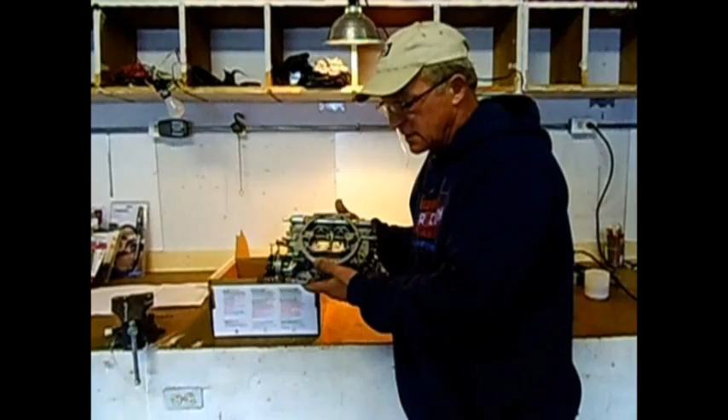Now, where the groove goes, as always, it goes in the area on the primaries alone on these carburetors. You don't want to do the secondaries because this area is too thin, and if you cut two grooves, they join in the center and ruin the effect. So you'll look for the primaries, which are generally smaller than the secondaries. The secondaries kick in only when you're in full throttle mode, which is not the best time for fuel efficiency. So the grooves go on the area of the plate closest to the engine.

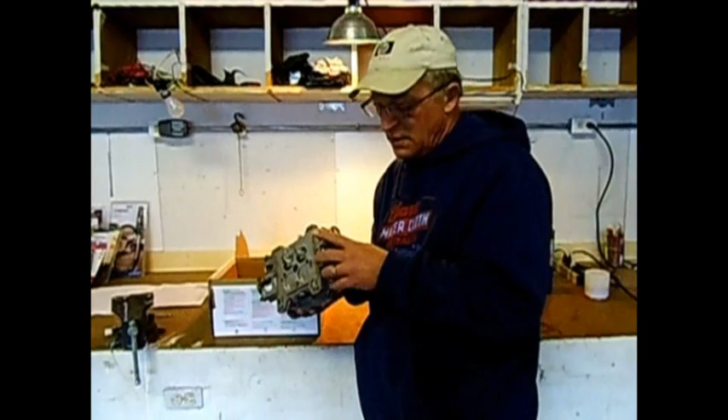So when the accelerator opens, the throttle plate passes over the groove. When you work on these carburetors, you need to make sure this throttle plate is all the way closed. There's linkage on the side in various configurations where you can see that throttle plate. Here, I'm going to move the linkage — this is the fast idle cam. You move it that way, set the throttle screw down, and look at it until the plate is completely closed. At that point, you're ready to groove. You may choose to take a zip tie or something to tie this area back so you know the throttle plate won't move while you're doing the groove. That's the carburetors — they're all basically the same.

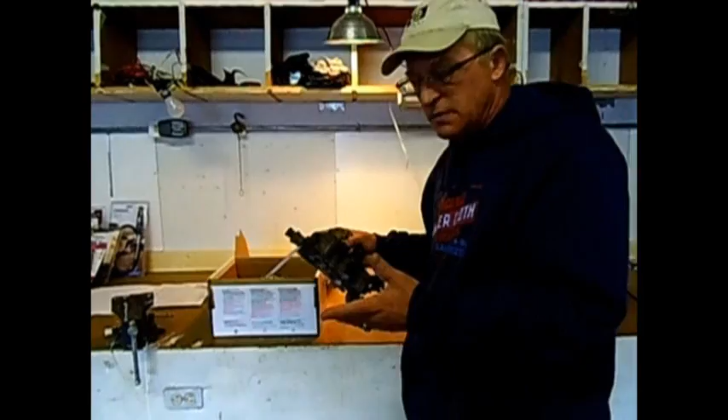That's the oldest style. They may be 1 barrel, 2 barrel, or 4 barrels, but then they moved up from that when computer controls came in, introducing what they call throttle body injected systems. Now these are the injectors. This is off a 305 or 350 series GM engine that came out starting in 1986 and ran through 1995. Today, engines equipped with these don't get the best mileage — generally somewhere between 8 and 12 miles per gallon when I see them, but when I leave them, they're anywhere from 20 to 30 easily.

In any event, when you take these off, this is where the fuel lines hook up. You'll need one wrench on this back piece and one wrench on the line that holds it in. Hold one still and move the fuel line connection, doing the same on both sides so you don't twist it up — because if you twist it up, you're going to wish you hadn't, and you'll have to make more trips to the parts store. A little trick when taking these throttle bodies off: loosen the bolts. There are 3 bolts that hold it in place — 1, 2, and 3.

They come in various configurations. There's a number stamped on the forward side of the car, on the throttle body injected unit, right here, that is the designator for that model. So if you need to order one, you'll need that number.

So you loosen up these bolts, but you do not remove them, just enough to where you can take these lines loose. Don't try to pull them out. If it's factory, it's a metal line bent a certain way, and if you bend it, you'll have a hard time aligning these things back up. So loosen the bolts, then take the fuel lines and drop that nut back out, and then lift the whole unit out of the engine.

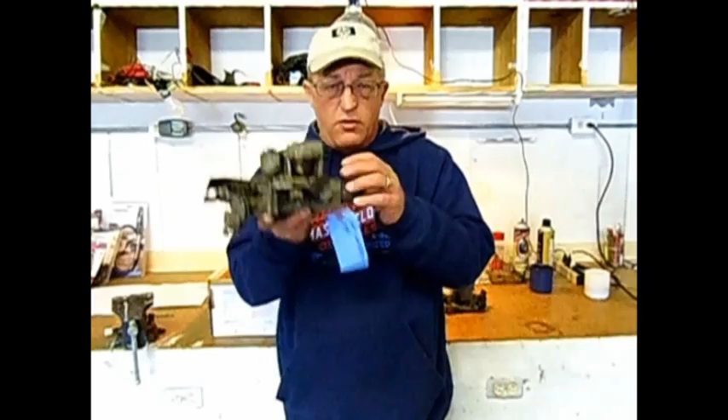The vacuum ports will matter. This is your PCV port, so you're going to be capping this one off on every engine that you do like this. That's the throttle body injected units.

From the throttle body units, advancements were made. The computer gained more and more control over the system, so they didn't need to have all the injectors up here. They moved to a multi-port system where the injectors are actually mounted just before the intake valve. Then the throttle body system became a whole lot simpler. All you have is a cable that opens and closes the throttle plate, and you have a connector for the throttle position sensor. Now, some are a little more complex.

They also have coolant lines run to them and a few other odds and ends, but don't worry about that too much. Just if you pull a hot engine in, make sure you relieve the pressure on the cooling system before you disconnect any coolant lines. You relieve the pressure, and then once the pressure's bled off, you close it back down. As the engine cools, it will create a suction on those lines so that when you do take the coolant lines off, it pulls the coolant in rather than pushing it out. You don't want that stuff spraying you in the face or wasting anything if you can help it.

Now, once again, on the back side, let me just pull this tape over here, it doesn't matter. This is what you'll be looking at. This is the idle air pathway. It goes through a channel on the intake manifold. A lot of them have them here where they vent right into the throttle body, or they manage through a valve on the outside of the engine. But the groove just goes in the area that turns toward the engine, in the throttle body where the plate is closest to the engine, so that the plate will move over the groove.

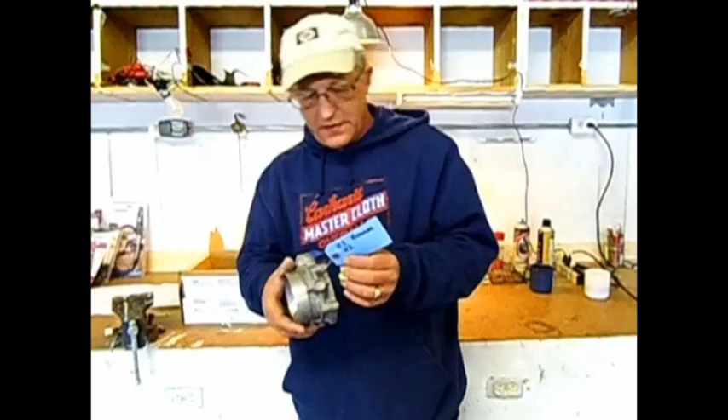It's the same in every engine. Some imports in the 90s have computer-controlled throttle bodies, but that was the next advance that hit the U.S. market. Now this is a throttle body off of a 2003 Hummer. As you can see, there's no cable. Instead, there's an electrical connection here that hooks up, and inside is a little electric motor.

So when the computer sends a positive, or if it sends a negative voltage, then the throttle plate will snap shut, which is what happens when you turn the key on in these GMs. Then it'll relax a little bit to the idle position. Then when you turn the key off, it relaxes completely.

In some GMs, this will cause what's called the Gadgetman plop, which is caused because of the groove that's machined in this plate here. You may be able to see it from that angle. Since the groove is always charged with air, when the key is turned off, it cuts off all power simultaneously to the system. So the groove is charged with air, the engine's running, then the computer turns it off and it tries to relax it. Well, what happens is the pressure inside the groove will snap that throttle plate shut, and it makes it sound as though you're slapping your hand on the end of a hose.

Let's see if I can make it happen here. Something like that, only a lot louder.

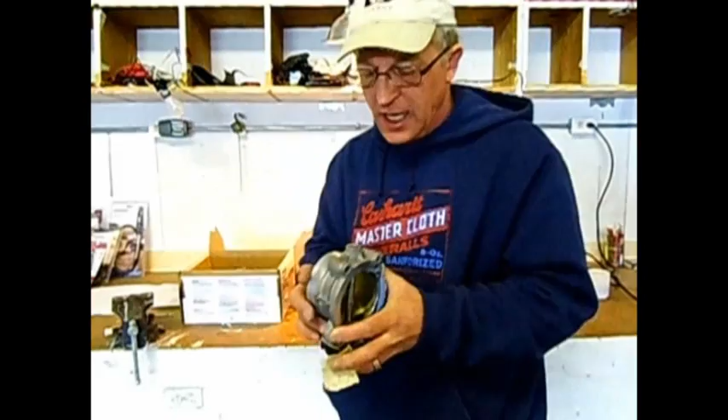Okay, so those are basically the throttle bodies you're going to be dealing with. Some will be a little more complex, some will be a little less complex. So the next step is we're going to cover how to do the groove.

Alright, now the first thing that you're going to want to do with every vehicle you touch is to get a copy of your modification report form. As you can see here, I've already had the customer fill out all of our information here so that we can have it in one place. Now we have her name, address, telephone number, email address, and it's very legible, so if you have problems reading their email address, please take the time to write it out underneath there and ask them to confirm it.

Then we have the year, make, and model of the vehicle, size of the engine, and we have the mileage count on it, 183,000. Now what you do is you're going to look at this form, and it's going to give you a little bit of information to start with, especially when you look under the hood. So, as I see here, it's got 183,000 miles on it.

Well, a little known fact about oxygen sensors is somewhere about 50,000 miles they give up the ghost. And what the computer does is when the oxygen sensor begins to get a little sluggish, it quits using the oxygen sensor as a point of reference to remap the fuel trims. And if it's not going to change the fuel trims, you're pissing in the wind as far as getting good results. You've got to make sure that all the equipment is up to snuff and they follow the proper maintenance cycle.

So the first question I would say is, when did you change your oxygen sensors last? In this case, I know that they were only done about 3 months ago. So we know that we're good on that. And the current mileage is there so that you have something to compare it to.

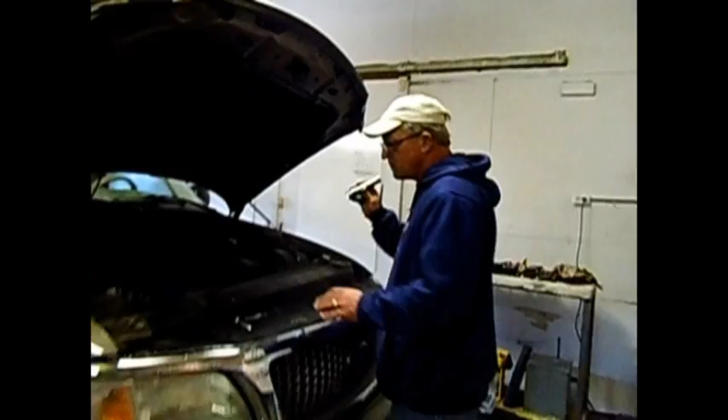Now, the first thing you want to do when you pop the hood is take a look. Come on over here and we'll identify everything. This is our air filter, and then there's the air tube, and here's where they put the mass airflow sensor or the intake air temperature sensor, or both. Usually they combine them now. But this right here is your intake air temperature sensor.

This is the spot for one modification. We have a 3.3 ohm resistor that we put into that. And then the air flows through the filter box all the way through here, and underneath that cover is where the throttle body is located.

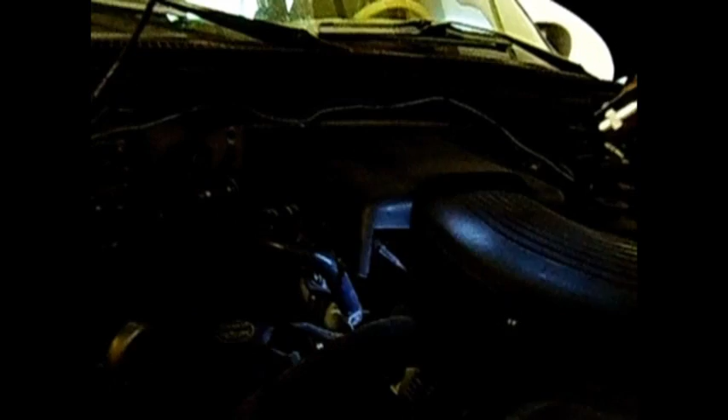Now you're just looking, and you can see this engine's got some pretty good hoses, so there's probably not going to be any real issues with vacuum. What we do is pull that cover off, then pull the throttle body out. We'll skip over a lot of that because it's pretty self-explanatory. There's a bolt there, two bolts over here, or one bolt, whatever, and the cover just pops off, and then you remove the throttle body.

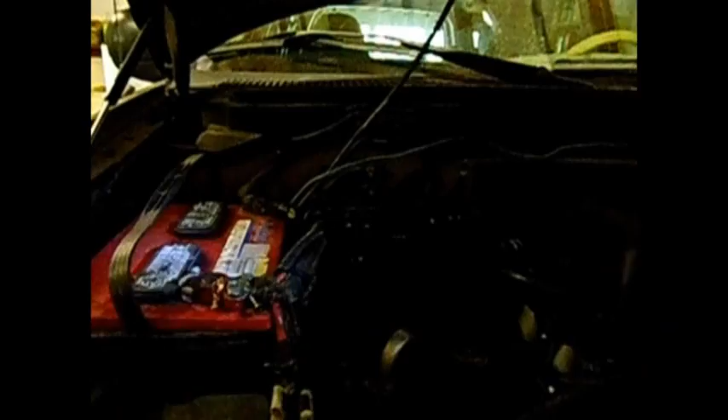Our concern right now is the battery, because one of the first things you have to do is get that computer reset so it can accept the new fuel trims. Now, this is the procedure for clearing the ECU. It is very, very, very simple. Most engines nowadays will use either an 8 or a 10 millimeter bolt on their cables.

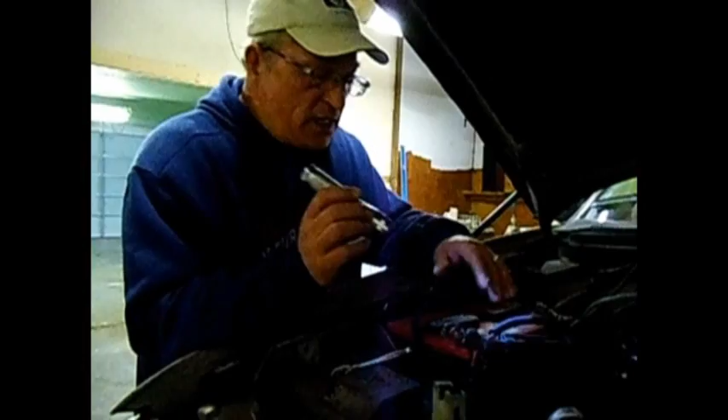As you can see, this one here was kind of jury rigged. I certainly did not do this work, but I've managed to hold it together for about a year. We have to replace all our cables, and that's why that hasn't been done yet. But what we're going to turn our attention to is the negative cable here, and this is an 8 millimeter wrench.

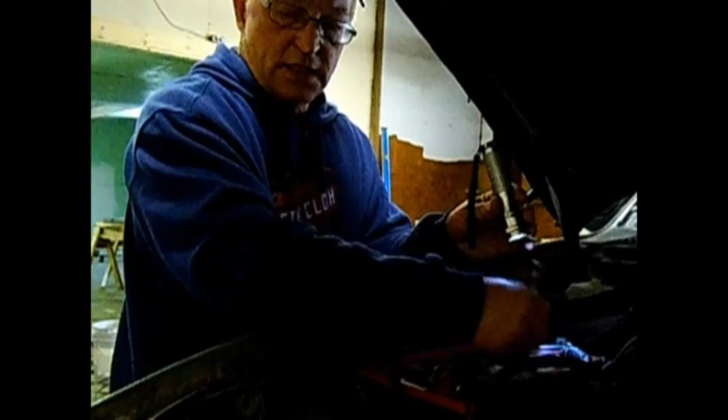You just loosen it up, just a little bit like that. Then you take and pull it off.

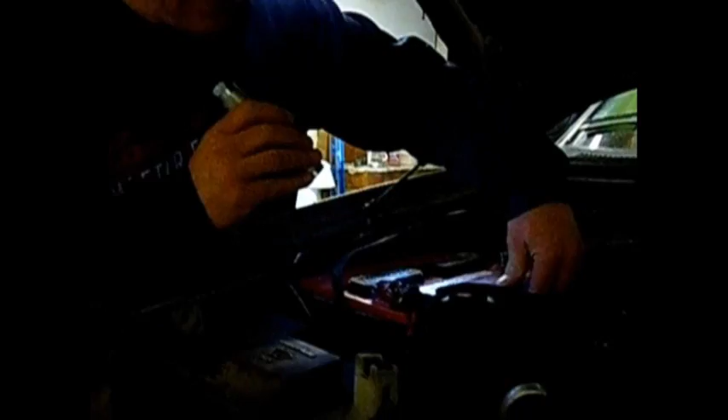Okay, so now the cable's been disconnected. Now you've got to get it where it's not going to be reconnecting, because you'll fry your jumper wire. But I've made a jumper wire here with a couple of different connectors, because it doesn't really matter what type of connector you use, so long as you connect the negative cable, like this right here, the one end of the clip, over to the positive.

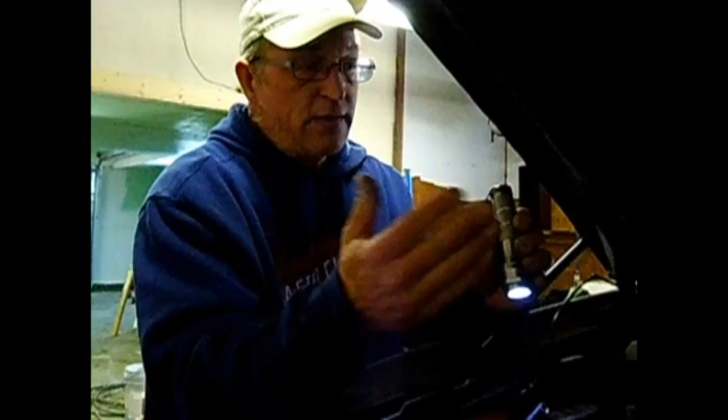Then that's it. What you do is turn the key into the run position, rolling it around where you'd normally be starting the engine, then release it so it falls back into the run position. You just leave it like that while you perform the rest of the modification, which should take about half an hour, sometimes longer. You'll get faster as you go. All right, so that's clearing the ECU. See how easy that is?

All right, now most of the throttle bodies you'll be cutting will be very simple. The newer throttle bodies, though, do require a little bit of setup before you do them, and those are the electronically controlled throttle bodies. So that's what we're about to show you now.

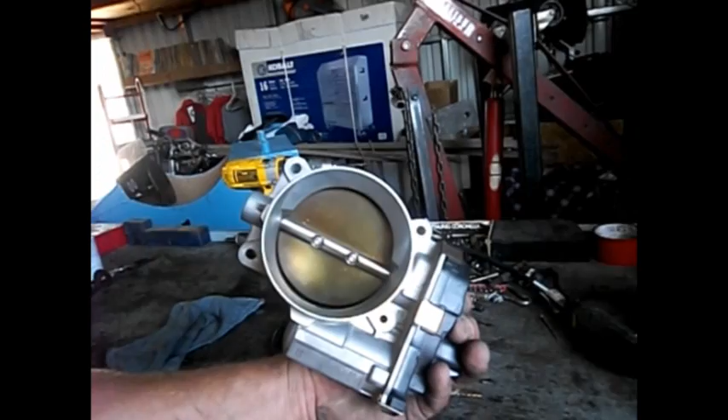Alright, now guys, we were talking about the drive-by-wire, fly-by-wire, computer-controlled throttle bodies, and what I have here is a throttle body off of an '08 GMC Yukon, which is the same across all General Motors. But if you look down here, this is how you tell where to put the groove. If you see that black line right there, that's the exhaust gases. That marks the natural idle position. Let's see if we can get real close there.

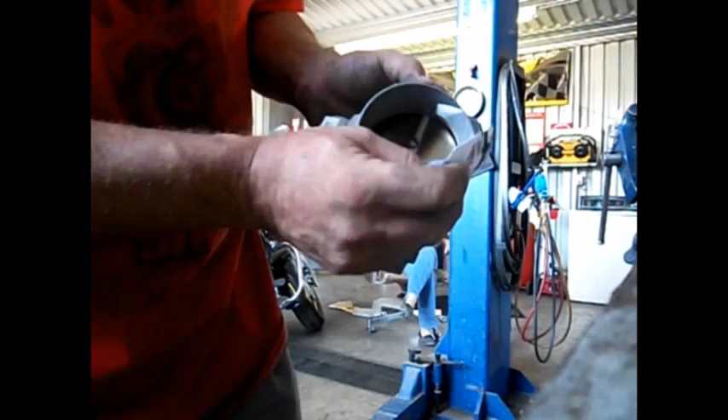So what we're going to do is slide that throttle plate closed and wedge it somewhere like that, just where a little bit of the black line is showing, and that's where we're going to cut the groove. Now I'm going to set this down. What I've done is snagged a business card from my bank, my business cards work good too, but I'm running out of those. So what we do is take this and simply place the business card in the upper section of this, then push it closed, and inspect it to see how close we are. So let's look. Look.

You see how little of that black line is showing? Some is, but not very much. We're looking at maybe a maximum of an eighth. So I'll probably push that a little closer shut, but that is how you find the position on fly-by-wire throttle bodies to cut your groove.

And again, the groove goes on this side right here. Because of the configuration with this throttle body, it's got a high scoop to it here, so I'm going to go with a steeper angle on my bit so that we can be sure to get the full groove into the throttle body itself. There you go, guys.

Have a great day. Alright, now I just finished grooving that throttle body, and I want to show you where I started, where I finished, and what it looks like. See, there is the throttle body. Of course, we start at the far left over here, and we do a little scoop, a little scallop every time. Now this one's done by the master, of course, but as you can see, there's still some scalloping.

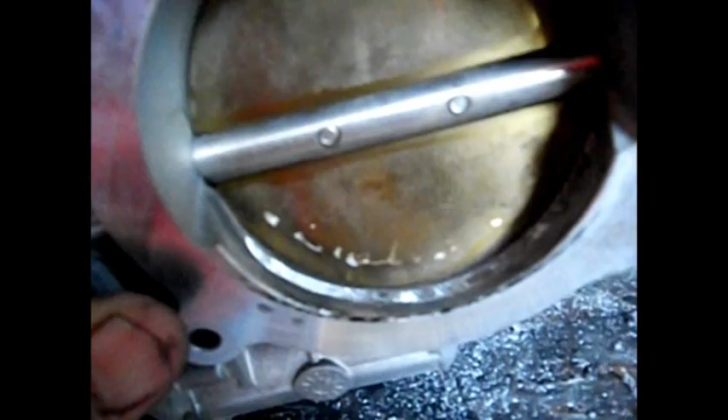And that's okay, I don't worry about that at all. But you can see how the bit actually brushed up against the top part of the throttle plate. That's the starting point. You look down, and you can see that there is. Let's see if this thing will focus a little better. Okay, you can see there's a little bit of clearance here between the throttle plate and the groove. I don't know if you can see that clearly from here or not, but there you go. You can see it there.

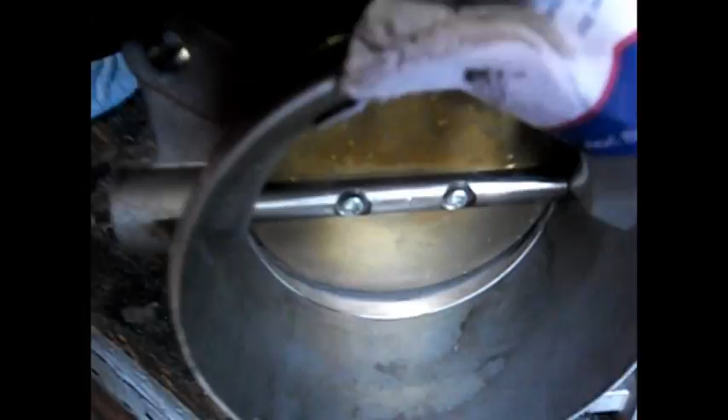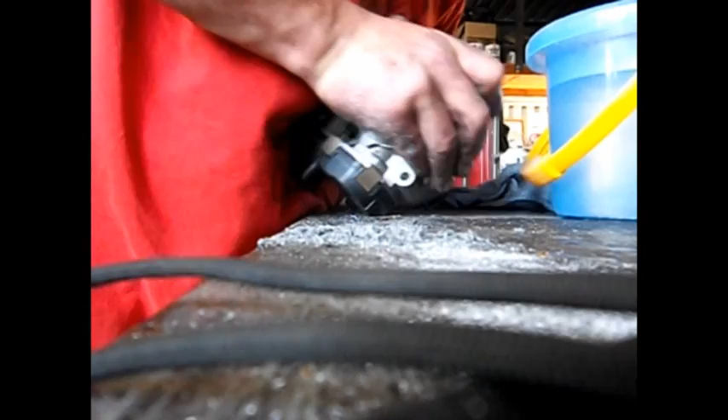All right, now looking at it from the front side, you see there is your black line. Now I'm just going to pop this loose, real simple. All right, push her down, push her around, and pull out your business card, which is now wasted.

So now, when you look down at the throttle body, and this is the test, you look here, you can see the groove, you can very clearly see the black mark, which is the natural idle position. And we close this up, that's where the engine will be idling, right there. It's going to relax that far. That's how much room you have before the groove actually gets in and kicks into full force, right about there. So there you go, that's the Vortec, and that is how to do a computer-controlled throttle, and these GMs, they're funky. So anyway, enjoy your adventures in Gadgetman Land.

Alright, now what we're going to do is talk about using the bit. So we got the throttle body off of the vehicle, now we're ready to move into cutting the groove. Alright, now what we have here, this is the normal throttle plate assembly. It's usually not that thick, it's a little out of scale, but I'm not an artist.

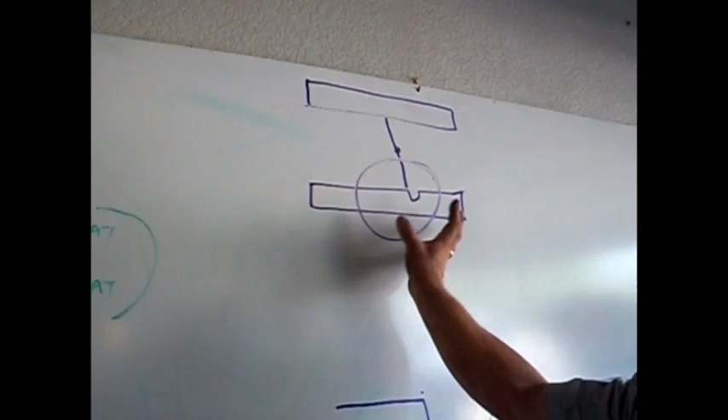I am a gadget man. Alright, so the throttle plate's here. All of the air is moving this direction in the throttle, okay, and here's the engine, it goes into the engine this way. Well, since all the air is hitting this plate, all this air is moving this direction, what happens is all of this air here gets compressed because it has to go down the plate. In order for it to continue moving, it has to come down the plate. Alright, that makes all of this air be forced into this small area, so it becomes extremely dense.

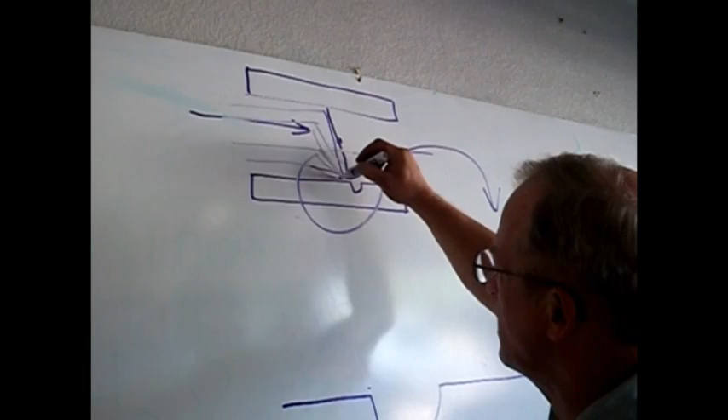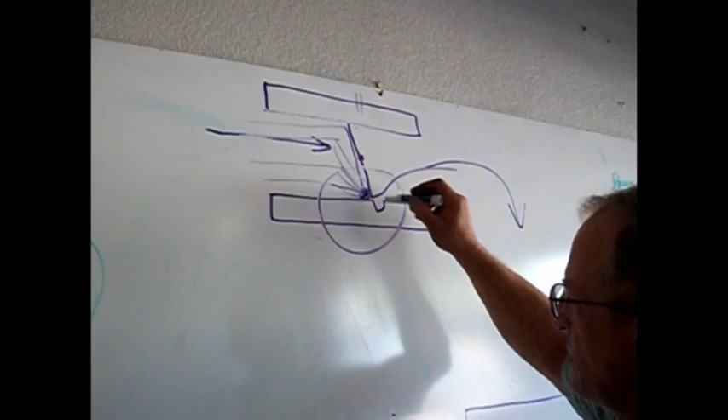Here, it's very high pressure here, this is where your air bleeds are, okay? Now, so what we're going to do is apply the groove just past the throttle plate, so that we can get the waveform that we need. Now, when the air is moving properly, what happens is the air will come in this side of the groove and curl up this way. The part above this will just go in and become the intake airstream.

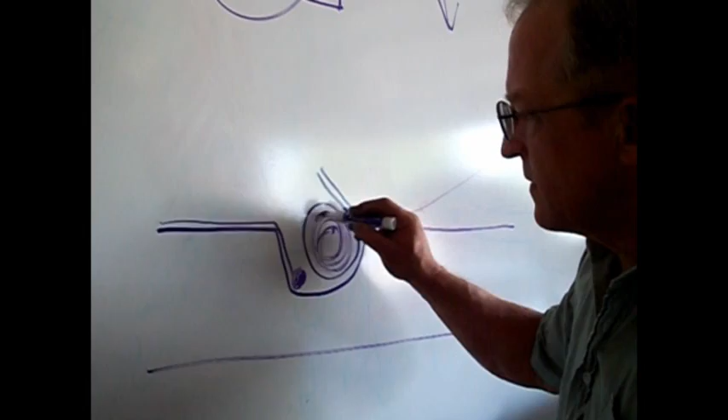For the first half of the downstroke, this ball of air is built, but then you've got other air coming in this way that comes down this way and then is gathered up this way. In order to get these two balls of air to be the proper dimensions, you have to have the groove cut at the correct angle. Well, actually, this should be down a little bit more. Anyway, let me just wipe this off, and we will take a look at how to do that.

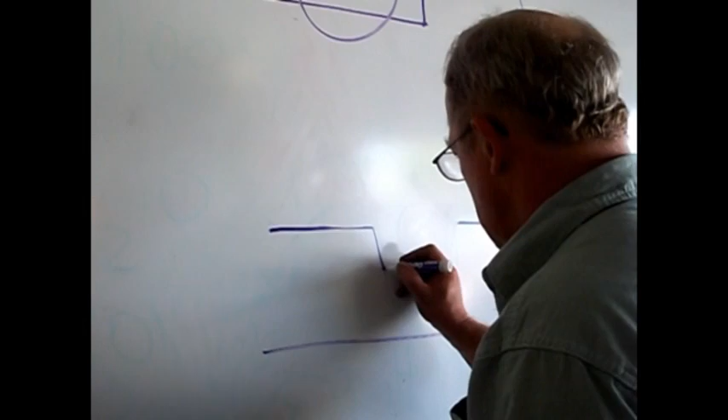Okay, so now here's your throttle plate. You're going to use this as the backstop for your cutting. You'll see that in just a couple of minutes on the DVD when Greg starts to cut the throttle body.

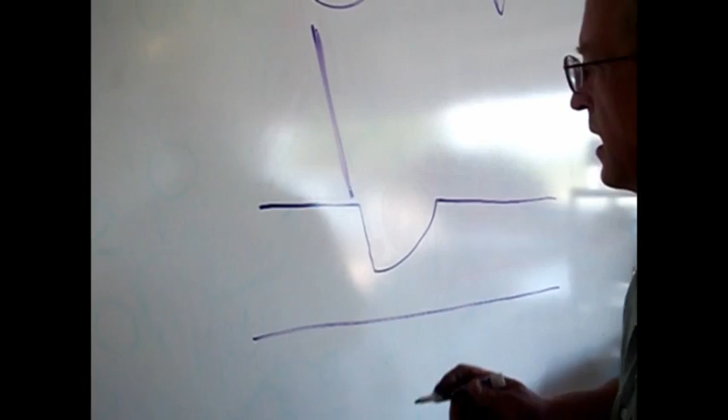Now this is one of the bits. You can see it's kind of like a half round shape. It's not exactly, but it's close, all right? And in order to get this cut correctly, you have to use the bit in the proper manner.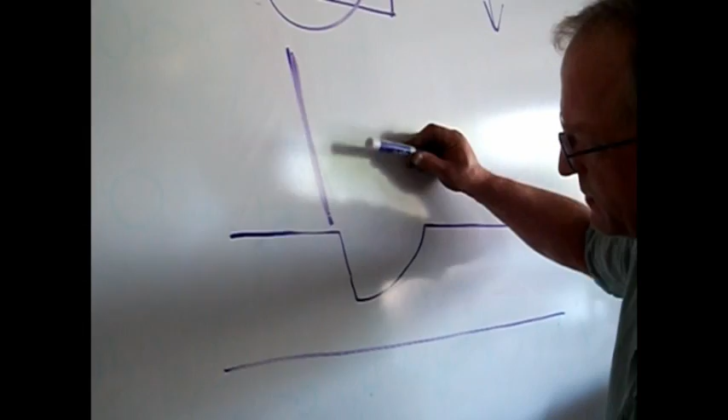So if you take the bit in your Dremel and you hold it like a pencil, which most people want to do, no, because it's going to make your groove incorrect. The bit is shaped perfectly to create the groove.

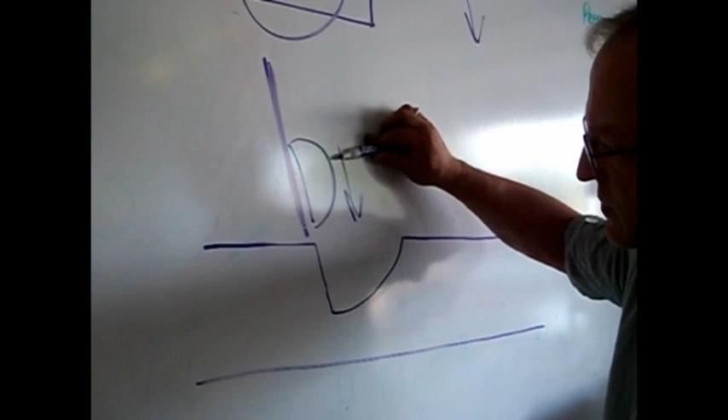So what you have to do is when you put it in, you take the bit up against here, like this, and then move it down in that fashion directly. You take it like this and move it this way, so you kind of lock the angle with the Dremel. You use the backdrop of the bit, hold it straight, and you go down.

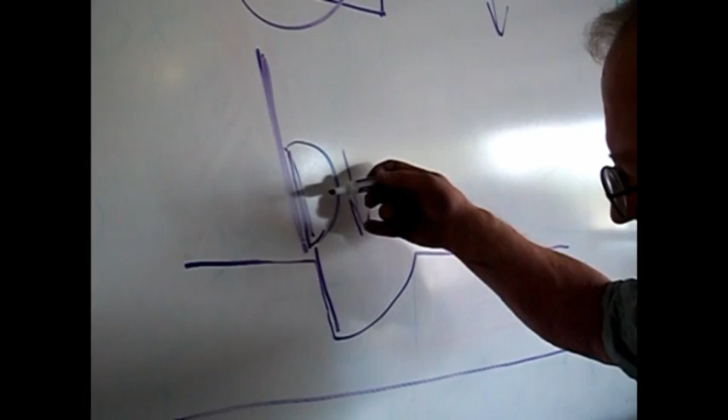Now there's two or three angles you've got to keep straight. Number one, flat against the throttle plate, okay? And then as it goes down, it just slides in and cuts the groove because you're moving the bit straight down. The straighter you move the bit, the more accurate the groove will be.

So do not do this, and do not do this. You want to keep this flat both this direction and this way, so that you get the proper shape. It takes a little bit of practice, don't worry about it. That's why you got these bits, so that you can practice with it.

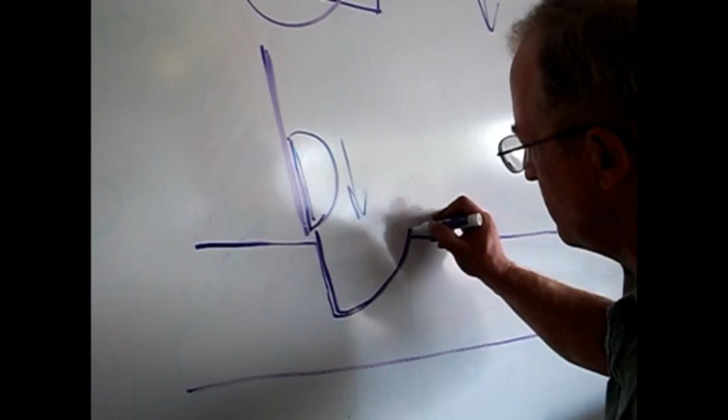Then when the groove is shaped correctly, the bit will go in here, and when you put it in afterwards, it'll lock into position. The more wobble you have, the less accurate your groove is. What you're looking for is about maybe at the most a 20-25 degree angle for maximum efficiency.

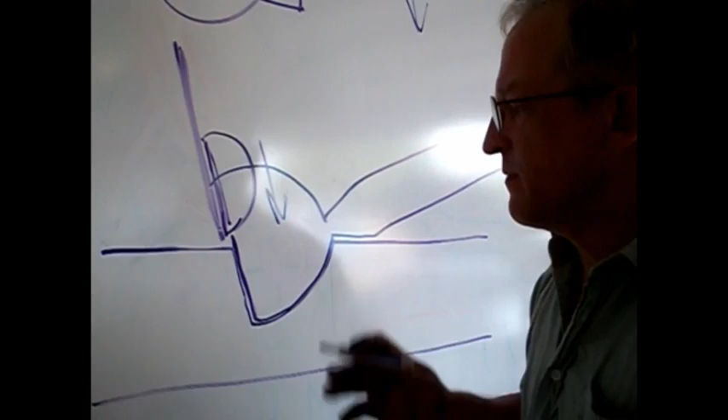So when you put it in the groove, you'll wiggle it back and forth like this. Again, we'll show you that in a few minutes. But if you look at your bits, there is a 15 degree angle right here just past the cutting surface. The cut goes all the way to here.

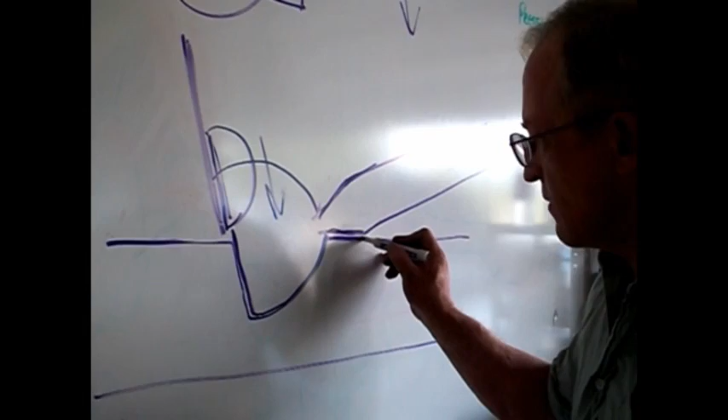This is undercut so that this angle here, when it's perfect, will lay flat on the throttle body like that. This is the angle of your Dremel, and here it's attached this way in your chuck. So as you see why you have to move it straight, and just look at your angle.

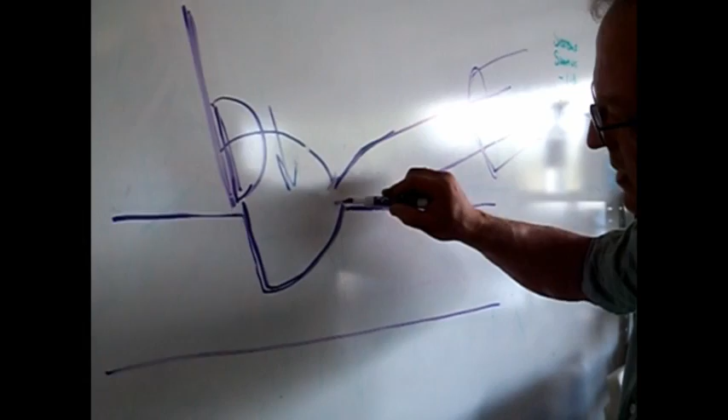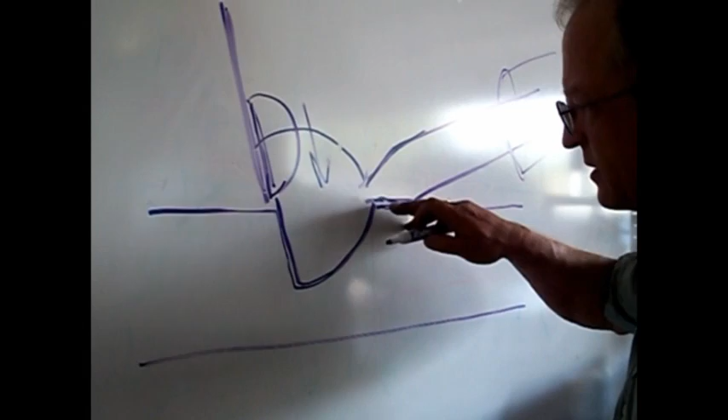If the plate is a little bit too steep, then change the angle of your bit, because you have to. This is the most important spot to look at when you're cutting the groove, is the angle at the taper just past the cutting surface. You'll see it. Alright, so that's the angle you want to be parallel to the airstream.

Alright, now we're going to go on and we're going to cut the groove. Now what I've done is I've pulled a few throttle bodies out of inventory here to show you some of the variables that you'll run across.

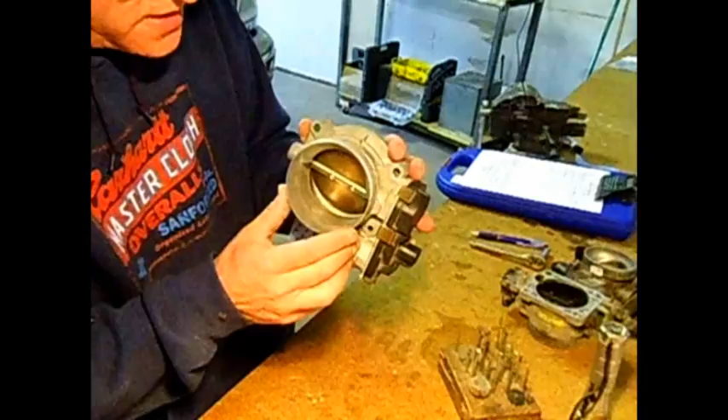This one right here is the computer-controlled GM throttle bodies. Now you can see in its natural rest, you can see down in there where the groove is. This has already been grooved, so you don't have to worry about that, but I'm going to show you how to position this. If you look at it very closely down in there, especially in this area, you can see that black mark running in, okay?

That black mark is caused by the idle air gases as they swirl inside the intake, and it shows you the natural idle position of the throttle plate. So you'll know exactly where it's supposed to be.

Now there's people that are testing, doing a reading on their throttle position sensor. You can do that if you want to. It takes a lot of extra time. So I'm going to show you the way I do it here in Gadgetman Land.

Now these are my patented spacers. All right, I'm sure you've seen those before. You would use anybody's business card, you know, I don't mind. But I use my old ones.

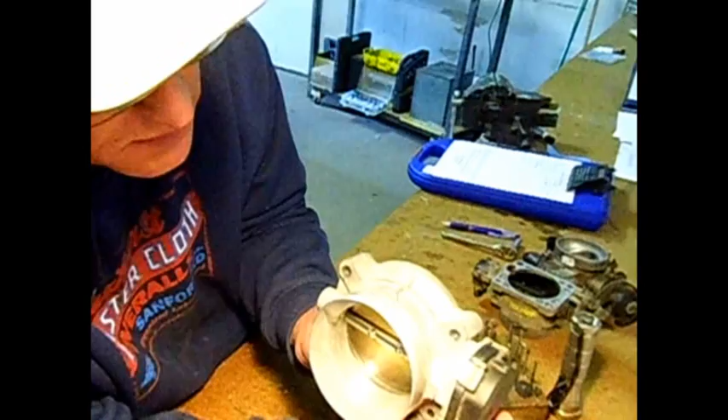So what you do now, you're going to want to see the throttle position somewhere where that black line just barely does show. You can see, I don't know if you can see it, but I can from here. So you want to just barely cover that spot. It looks like it goes, I'm looking at the black mark back in this corner here.

It looks like that's about the natural idle position. So what I'm going to do is slide my business card up in there like this, and then just push the plate closed until I see that we're covering the natural idle spot. That looks about right. So when you go back onto the back side, you'll see where it needs to go.

Now, in this particular model, we did cut through right here. All right, this is what you're going to be looking for. If you see right there, you would have been able to see light through that hole.

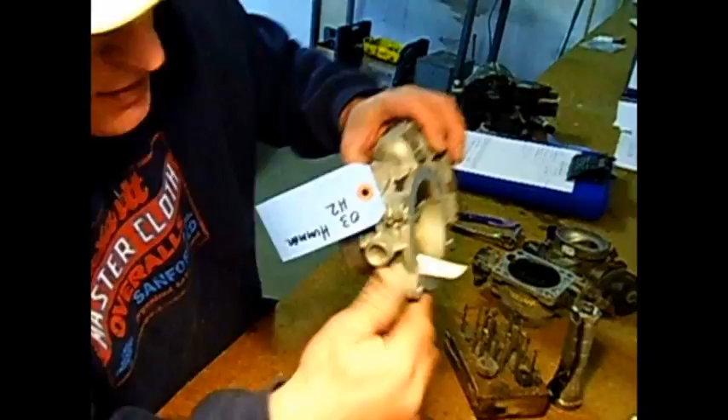So what we did was we took a little drill bit, which comes with your business in a box. This is a 1/8 inch drill bit, so that it fits into the collet of your Foredom very nicely. You take this into your Dremel and clean it first, then you rough up the metal really good with the drill bit, and scrape it good to give the JB weld something to bond to.

Then you mix it 50-50, and put a little sprinkle of aluminum shavings. You can see I've got plenty laying right here on the counter for exactly that purpose. I don't throw anything away if I can help it, if I can find a use for it.

All right, so we roughed it up, then we just filled it with JB, and then we take some of this here where the JB weld was applied and sprinkle it down in there and push it in. Then just leave it like that for a couple minutes, then dump it out, and you're done. Okay, and that's how you get the groove.

Now the groove is positioned in this way, so that when your bit goes into it, you start. This is slightly curved. It rolls up with the throttle plate. So that's going to cause your angle to be a little bit extreme, but you see that bit right there fits nice and snugly into that hole.

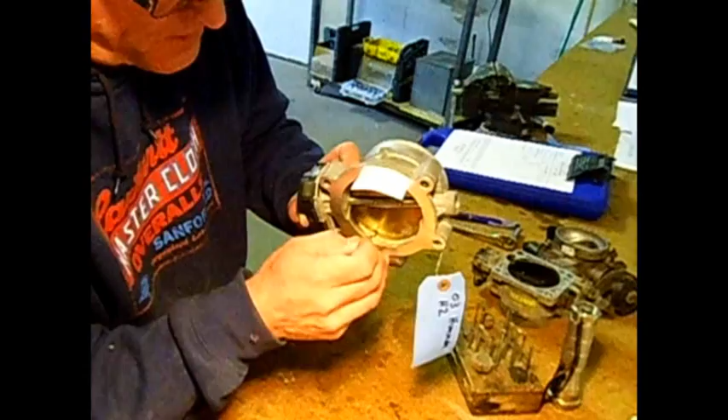If you get 1/16 of an inch too far away, well, just put it this way: 1/16 of an inch difference in position closer to the engine will cut your results by probably 25%. So you want this to be as close to the natural idle position as possible when you cut the groove on these controlled throttle bodies.

With the other ones, you don't have to worry about measuring it like this. But once you get that position, then you just put your bit up in there, and you buff it up against the plate, and you just make your groove. That's it.

These I don't like doing. They're indicative of too much controls in the computer system, and I prefer doing the older cars because the people that own the older cars really need the help more.

Now here is a Ford throttle body that is unmodified. It's just a junkyard part, but that's what I'm doing, buying junkyard throttle bodies and offering them back up on our eBay store, which we haven't got yet, so we're using them in our mail-in modifications. All right, now if you look at this, it's got a little swirl here.

Now in some of these engines with this throttle body, they have an idle air screw that's right here. There are one of these, either here or here, I can't remember exactly which, but it was on the earlier versions. Then they just didn't cut the holes. So what it does is it lets air from this side of the throttle body back through this passageway controlled by a screw, and then into the intake manifold through that passage right there. You don't have to worry about that on this model.

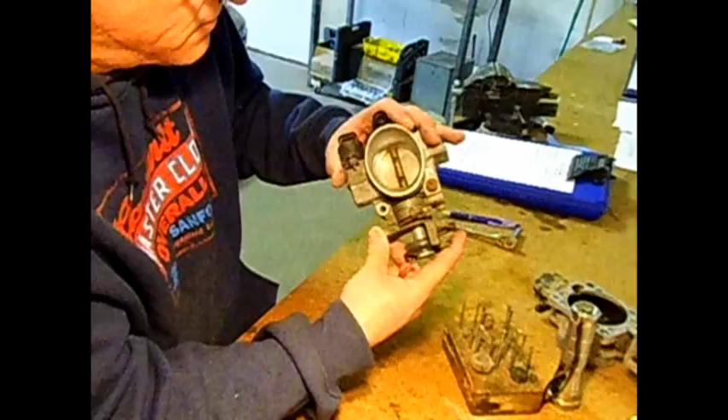All right, now this is another style of throttle body. I don't remember what this came off of. I think it came off of an older 3200 GM engine. But what I wanted to show you was the idle air pathway.

If you look real closely, you can see this one's been filled in here with JB Weld. Normally that would be open. But the idle air pathways are handled in so many different ways, it's not possible for me to show you them all on a single video, so I'm not going to worry about it.

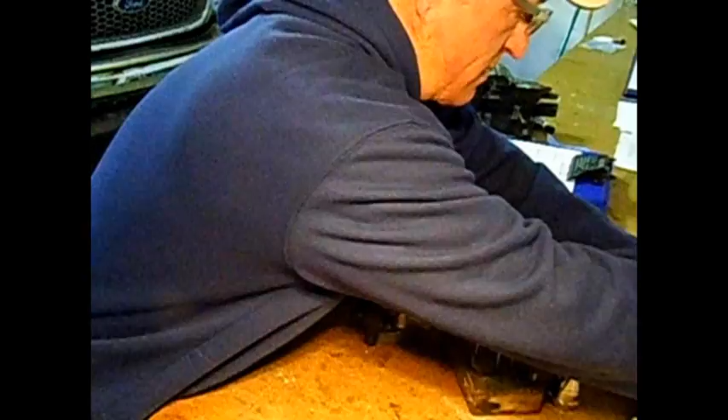You can see this has been filled in here with JB Weld, and the way that's done is you open the throttle plate up and put a business card in - I'll just reach over here and pull this down. I can. Waste not, want not. You tear the business card a little bit like that.

It's better when you're doing JB welding on these to use certain cards. Real estate agents have the nicest cards, always nice and shiny and pretty. Well, the shiny business cards have a plastic coating that prevents the JB Quick from sticking properly.

That's what you're going to be using, JB Quick - you can see it comes in two parts. But you've got to get a backdrop for it. So you stick this in there and position it right even with the top of the throttle body, kind of like that. It's very simple, and then you've got a curve right here that matches the shape of the throttle body.

Then you fill this in with JB Weld. Remember, this is your idle air control valve - it's drawing air through that little tiny opening. I don't know if you can see it in there, right there. That's your idle air control entrance. It goes in through that hole, comes back through this valve, through that bored hole.

That's a cap in there too, by the way. And then it comes through the valve and out this hole right here. I'm running V8 engines off of holes that are 1/8 of an inch in diameter, and this hole here is slightly larger than that because it needed to be to manage the engine.

What you do is fill it in here, then you take the rest of your business card, lay it here like this, and turn it upside down on the table, blocking it in where it's going to sit flat. Then you just let it sit there for 15-20 minutes until the JB Quick hardens.

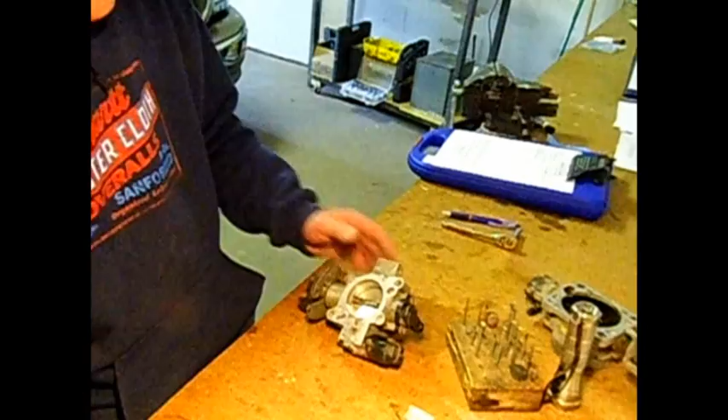One thing extremely important to have in your operations is a good sharp pocket knife, because to speed this up until the JB Quick hardens all the way, you can slice it back and forth like this. You can see the scrape marks from where I've done this throttle body that way too. You just cut it off like that, and then examine it - if it's smooth, you're good to go.

You can tolerate a couple thousandths of an inch without a big deal because you've got a gasket that goes here. Oh, speaking of gaskets, if you're going to pull a Honda throttle body, always have a spare gasket handy, because they're not carried in every town.

I had to do one the other day, and when you take those Honda throttle bodies off, they have cement on both sides of the gasket, which locks the throttle body to the intake manifold. I've never done one where that gasket has not come apart, and in many pieces most of the time. So you have to either be prepared to make yourself a new gasket.

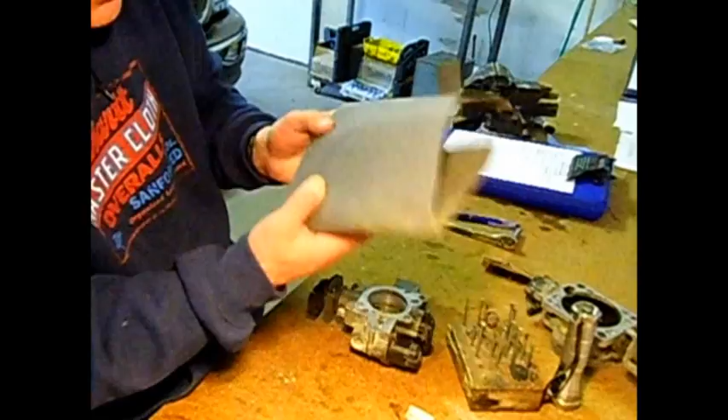I'll show you how close I keep my gasket material - you see, I don't even have to move, it's right here. So you can make a new gasket if you need to. The gasket material is extremely inexpensive; I've had this for about 2 years and still haven't used but about half of it. So with Hondas, have you a gasket handy?

The reason I say with Hondas have a gasket handy, don't make a new one, is because of the way the idle air is routed. If you make your own gasket, 9 times out of 10 there'll be no air to run the engine at idle. Okay, so now you have that.

Once you've built that up, then you open up the plate and you just tear that card out. And then you've got a nice shape here, and a nice shape here. It's all flat, and you're good to go. But you still need to open up that pathway.

Now what I do is I take a 1/8 inch drill bit and drill right back into the hole. It's a good idea to remove the idle air control valve in cases like this, because you don't want to drill into the piston and cause it to malfunction. So you just run a drill bit in there. All of the JB Weld is falling to the bottom when you set it down on the table, and then you just drill a hole to let some idle air in, but not a whole lot.

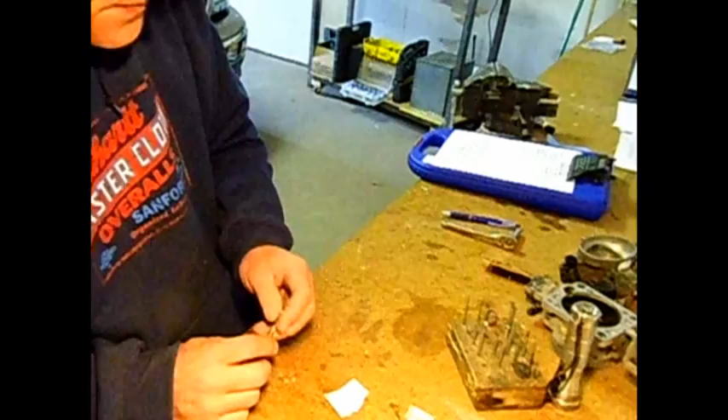Alright, so now we go to bit selection. This is where a lot of people have a great deal of difficulty, but it's really one of the simplest things in the world to do. What you've got to do is look at the space from the throttle plate.

You can see that's the plate, that's where the groove is going, right there. The side that turns toward the engine is where the groove goes, and it goes as close to 180 degrees as you can get, which usually means about 160 is maximum. This is one where we'll be able to put the maximum groove in.

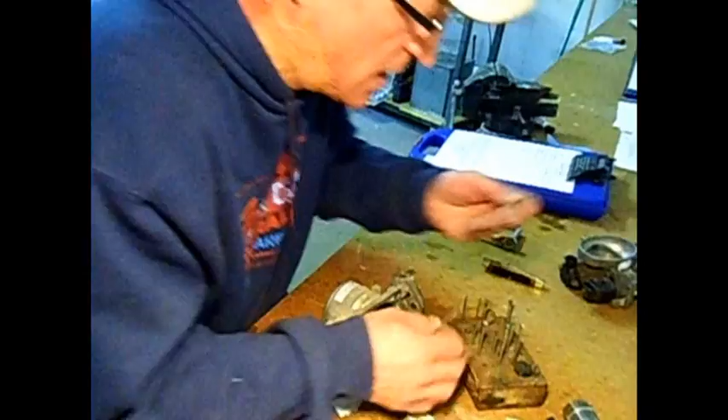So you simply take your bits. I have one of each size here handy. Small, medium, and large. You can know that the small is definitely going to work, but that's not big enough. You want to use the largest bit possible for every application, the largest bit possible. The medium will work without a doubt, but it's still not quite enough. Let's try the large one because I know the large one will.

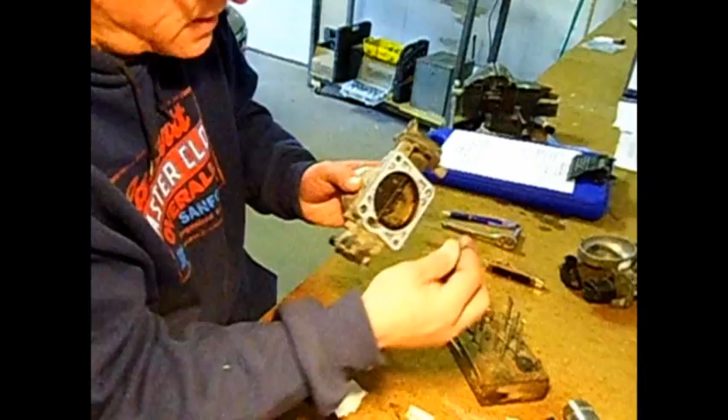And if you look, you can see that all of the cutting surface is contained within the throttle body itself. If the bit rides out where the edge of the groove would be outside the throttle body, then you've got too large of a bit. So go down to the next size smaller. That is all there is to it.

Don't worry about cutting through on the outside. We've already shown you how to handle that, like with this one right here. Use a flashlight, go inside out and outside in wherever you suspect there might be a leak. Hold it in the dark, use only your flashlight, and then cut it.

Alright, so now this is a Ford throttle body, pretty standard equipment on most 4.6 and 5.4 liter engines. Now we've got our bit selection. We know we're going to use the large one because it fits.

That's what I usually keep in my drilling lab. What I'm using is a professional version, it's called a Foredom, I'll show you a picture of it. The handle's a little different, it's more bulky. But I've had this thing for years and never had any problem with it, whereas I do a lot of modifications. So you guys won't have such an issue, but I've gone through dozens of Dremels wearing them out until I bought this.

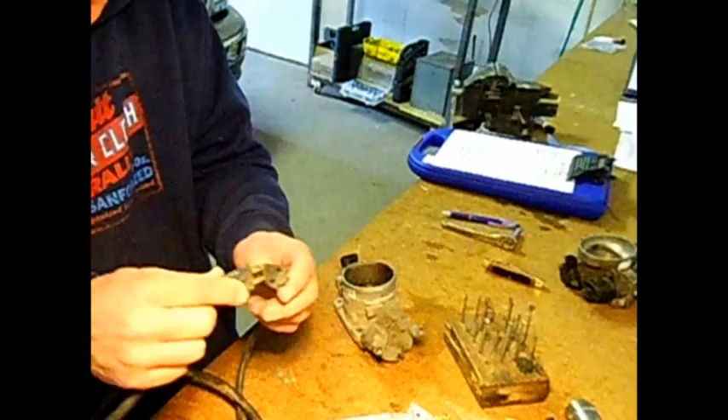Alright, now this device is on a pedal feed. I'm going to lift it up to the camera so I can show you. This is the pedal feed, so I can control it all with my foot. Now you can hook up something like this to your Dremel also, and they work beautifully. It comes with a plug, this is the outlet plug, so you can plug your rotary tool right into that. You can find these on old sewing machines or whatever, but they work great.

Alright, so I can drop it down there where I can get to it.

Now one of the keys to making your bits last longer is keeping them cool and well lubricated. If you short yourself on this, your bit is not going to last nearly as long, and as a result you're going to be wanting replacement bits. So take the time to make your bit work as long as possible.

Take care. The way I do it is I take this right here - this is just a coffee cup, but inside it I use power steering fluid. You can use transmission fluid, oil, or cutting fluid. I understand there's some far superior stuff out there, but I want to show you the way I learned this, and you can enhance it as you go according to your needs.

First thing I do is dunk the bit into the fluid. I don't like getting sprayed, so I give the Dremel a little kick to throw the excess off. Then I come over here. You'll see in the manual that the bit cuts right to left, so that's the same motion your hand is going to take, but you don't want to overtax your bit.

So what you want to do is make your cuts small and frequent. If the bit gets hot enough to melt aluminum, the aluminum begins to stick inside the cutting flutes, and then have a nice day getting that out. It's very difficult, so you'll need a set of picks. Craftsman makes a great set available at Ace Hardware now too - that's where I found mine.

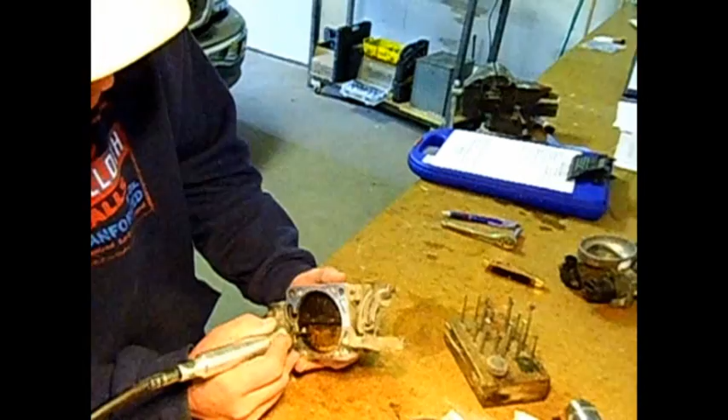So now you're getting to the point where you're ready to cut the groove. We're going to start over here. This axle is made out of case hardened steel in almost every throttle body I've ever seen, so it lasts a good long while. But if you hit that axle with your bit while it's running, you are going to dull your bit very quickly and it'll be worthless to you. So just stay away from that axle shaft.

So I start about where I've got one bit width between the top of the bit and the axle shaft. Now I'm going to be looking for the right angle. Here's the trick - all right guys, pay attention.

I'm going to fire up my rotary tool and brush up against the plate. Then I'm going to show you the scuff mark that's made and how you can use that to indicate whether your angle is correct or not, or to get the best angle you possibly can.

So I'm just going to start. I'm holding the throttle body up off the table so I have some flexibility with it. I don't brace it here because that makes it rigid, and you need to be flexible to correct your angle as you go.

So here we go - brush up against the plate. Now what I'm doing, I have to calm down for you. What I'm doing now is leaning my hand, and hence the shaft of the Dremel, towards this center mark right there. That's how you're going to get the right angle every time.

So when I run up against it there, what I did was stay away from the throttle body itself and just buffed the plate to see how good my angle was. I'll come in real close there, and hopefully you can see that scuff mark. I roll it around.

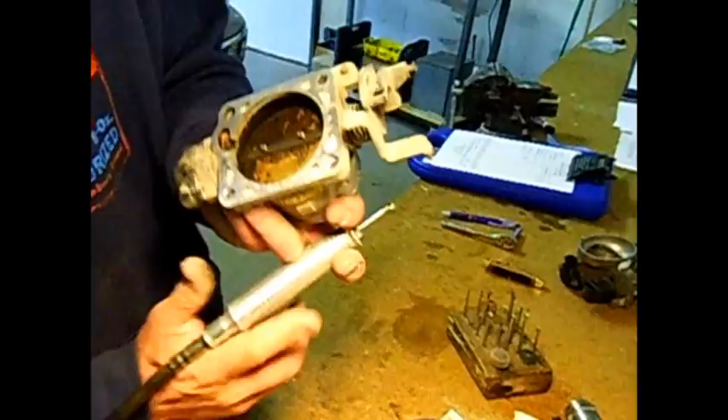If you take a straight line from where my cut is going to start, what we're looking for is an arc that bisects the edge of the bit. If you're leaning the bit too far to the right, you're going to get a cut over on the right hand side. I'll show you on the dark area so you can see it more clearly.

First, I'm going to lean the bit to the left - just go straight up. Lean the bit to the left, and what you get is a cut on the left-hand side. Lean it to the right, and you get a cut that goes on the right-hand side. Lean it directly up, and you can see the arc goes directly across. That's how you know you got your angle straight.

So without further ado, I'm going to go ahead and start the cut. You'll watch, I'll reposition myself until I get the angle correct. There we go, that's it. Now just drop it down and make sure I get the right angle.

Notice I'm taking my time. There. If you just heard that, you heard it release and it picked up speed. That was when the bit was in maximum depth. That's what you're listening for when you let off the pedal. Get the bit out of the groove as quick as you can.

Now I'll show you what a good angle is. If you look here, you can see that the angle of the bit is up by about 15 to 20 degrees, somewhere in that range. Now, when you do your cut, if you get out of there quickly, then you'll get a case where there's like no side-to-side motion of that bit. It's locked into place. That's what you're looking for. The closer you get to zero movement, the closer to a perfect groove you have.

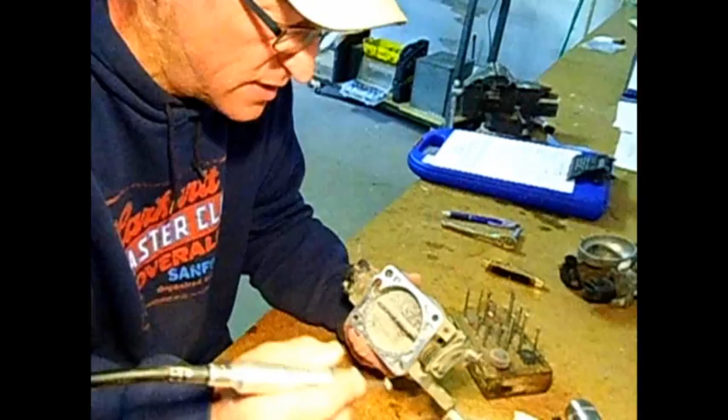Now, if you're going to bang the shavings out of your throttle body, be aware sometimes these throttle position sensors stick out below, and if they do, you might wind up cracking it off. So be careful what you're doing.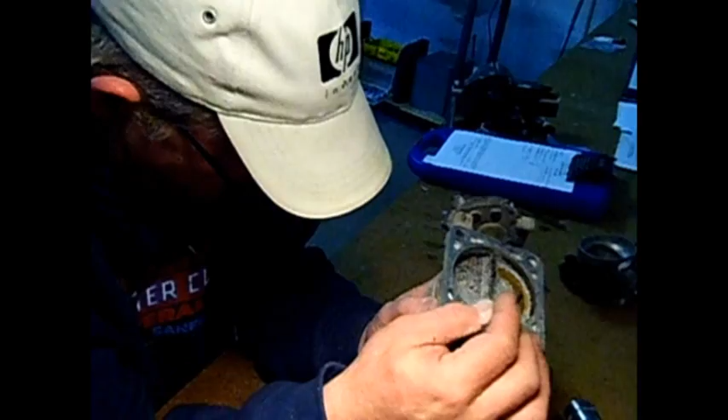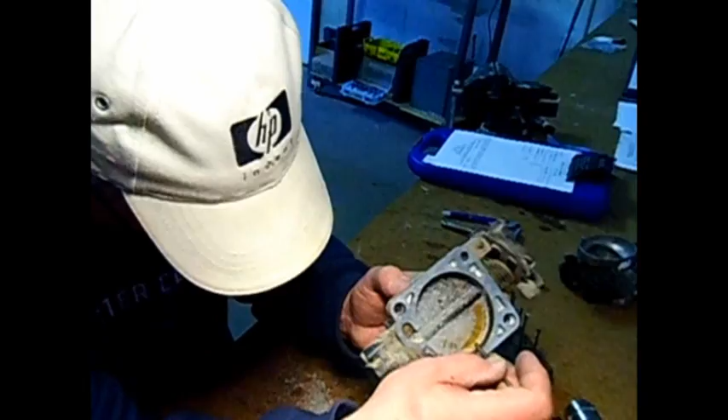Alright, now on this particular throttle body, like I say, each one of these is different. I don't know if you can see it clearly on the camera, but it comes up to about here, then there's a bevel, a chamfer if you will, that angles down slightly. So as I get closer to this area with my bit, the bit will go deeper and deeper to accommodate the extra depth caused by the chamfering. We don't worry about that because our goal is to get the groove in there in appropriate shape, appropriate position, appropriate angle. But it's not a perfection thing.

Do not seek perfection on this. The groove is not going to be perfect the first time. You'll get better with it as you practice.

Again, cut and dunk, cut and dunk.

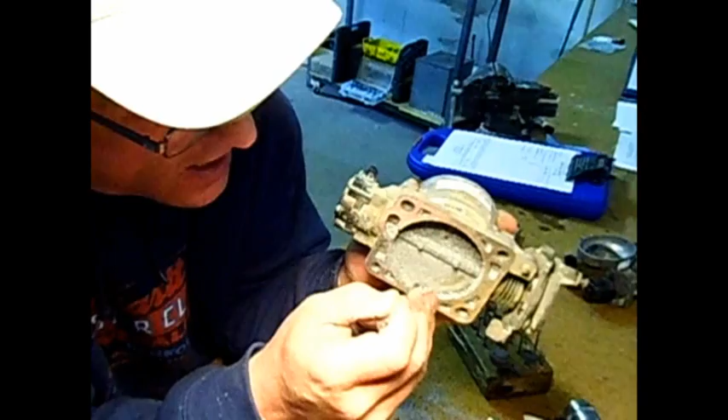And that, my friends, is cutting the Gadgetman groove. Now, I want you to look very closely in here, and you'll see that that wall is almost perfectly flat. You can still see marks in there where the bit rolled, where I didn't have my angle perfect. But again, this is not a perfect science. All you're looking to do is get that shape into the passage as the air flows this direction. So what you see left to right is only an indication of how accurate your groove is. And I have to say that that is probably one of the prettiest grooves that I've ever cut.

Let me give it a rinse real quick.

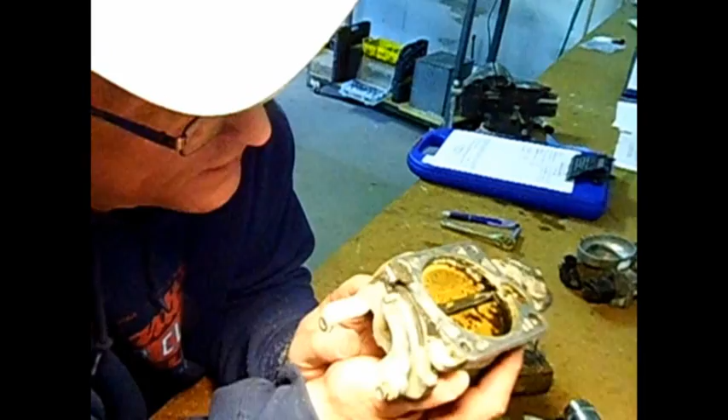Okay, and there you go. That's the Gadgetman groove. You like it? Well, you're going to be making your own real soon, Mike.

So anyway, if you'll notice there's a little bit of a ridge there, a little space, a gap between the throttle plate and the groove itself. That is perfectly fine, don't worry about that. But that looks as good a groove as I ever done.

So let's cut the groove. Now what I'm going to do is show you on a whiteboard why it's important to do what you just saw in that video. Because the groove was perfect - if you take the top of the groove and just roll it out flat in your mind's eye, what you're going to have is something that looks about like this. And then it'll be rounded off on the edge, something like that.

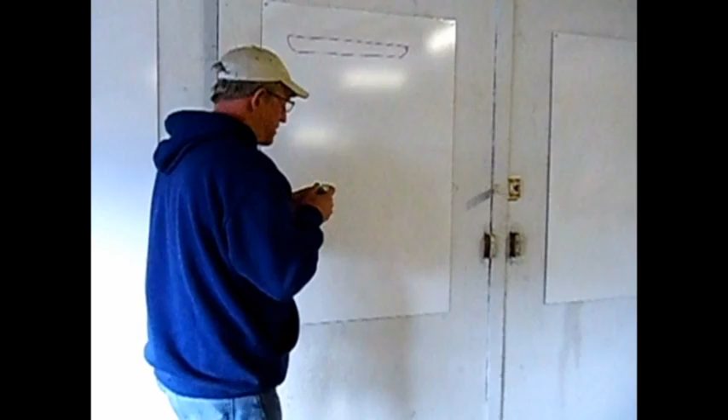That's what you should have when you're done, if it's a perfect groove. Now, if you turn the bit too far to the right, remember the buff marks on the throttle plate will tell you whether you're too far to the right or to the left. So you keep your angle correct.

If you go off, well, let's go on down here and do it again. This is supposed to be a perfect groove. Of course, remember, I'm not an artist, I'm just a gadget man. There's your perfect groove.

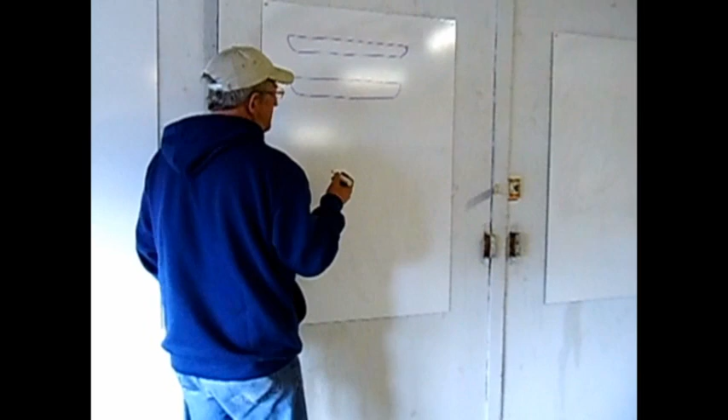Well, what happens when you lean it too far - we'll say for this illustration that you lean it too far to the right - is you're going to have a groove that goes into the throttle plate here, right? Because that's about your bit shape. And then the bit will actually cut this out even wider, okay? So what you'll wind up with is a groove that looks like this.

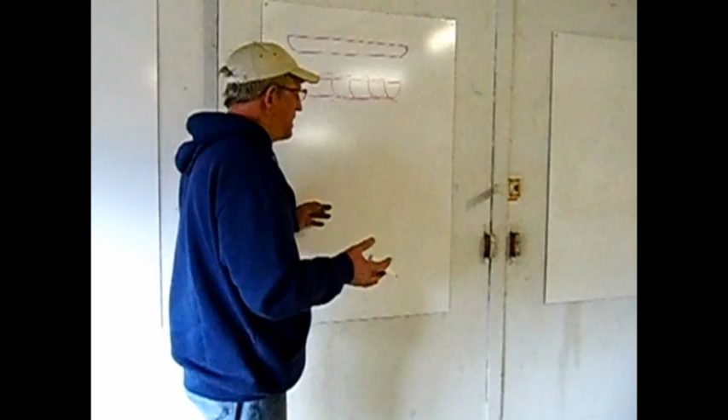So what you wind up with is the wrong aerodynamics, and your groove, if you do it like that, will wind up - this is the way it's supposed to be shaped, okay, about like that. Now when you do this, what winds up happening is this becomes more choppy on the back end, but what really hurts you is on this end because it changes the shape of the groove.

And you wind up losing this area here - it gets cut out, and this winds up being a lot wider and flatter. That means that this area right here, where the air is supposed to be captured for the largest ball of air rolling up this way, you lose that, so it can't capture as much air.

In addition, this area down here winds up being in the wrong position, so it can't thrust that up at the right angle. So you wind up with it pushing directly into the wall when it comes time for it to expand into the system.

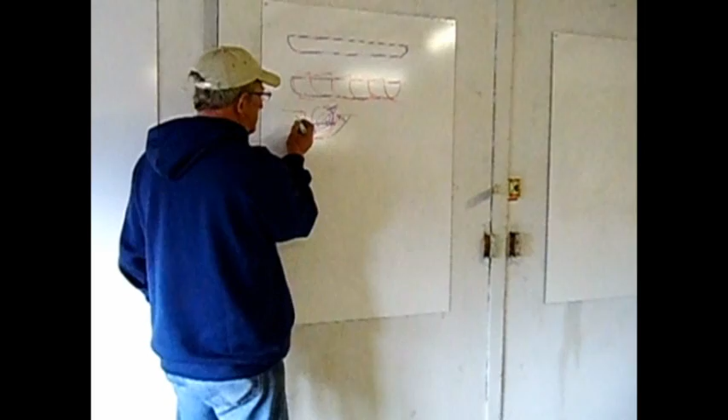That's why it's critically important that you get your left-to-right as well as your vertical correct. Because if your vertical is too much - if you're too steep - then what happens is the groove comes like this, and the air comes down here, but too much of it catches this way. And this ball of air on this side winds up being too small.

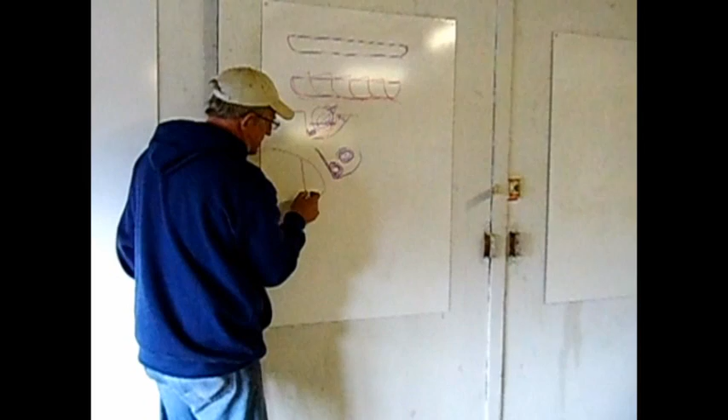If you're too shallow, then what happens is the air that's coming in winds up going this way and starts out in the wrong direction. It's got to come down this wall and roll up this direction to give you the proper effects. So that's why this angle is selected.

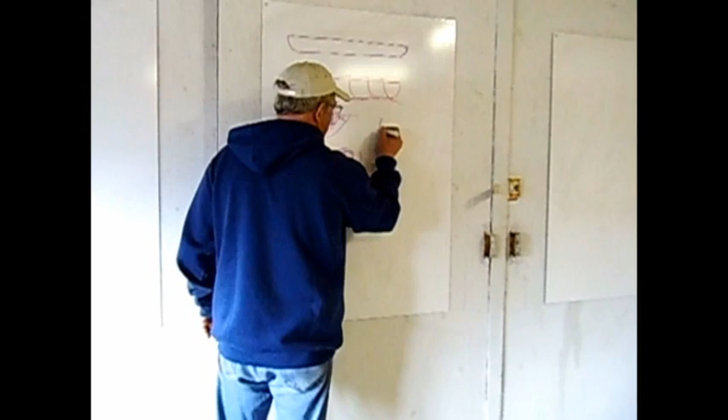The angle is 15 to 22 degrees. Now that's a pretty precise measurement, but if the bits are supposed to have a taper on, we found that there's some in the batches that aren't exactly right - but as long as you have the angle of 15 degrees, get yourself a protractor. You can pull up an image of one online.

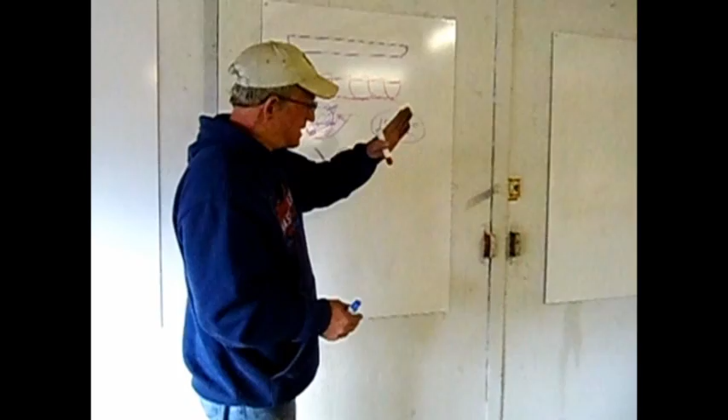And guys, that's your number one resource - online. Use Google, do a search. Find out where the PCV valve is on the vehicle that you're using. Do the internet searches. But when you pull up an image, you'll be able to see that's 45 degrees. Half of 45 is 22 and a half. So here's 90 degrees, right?

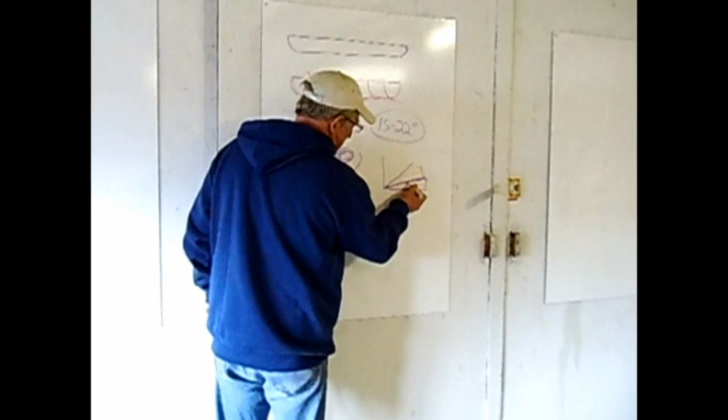There's 90 degrees, there's 45, there's 22 and a half, somewhere—well, that's actually about 20, right? So that's the angle you want your bit to be at, right about there. You have a small range, about 5 degrees. There's another 5, and another 5, all the way up to 45. So that's about the right angle, right in that range is where you want your bit held. And the left to right this way—that's why we do it the way we do it in Gadgetman Land.